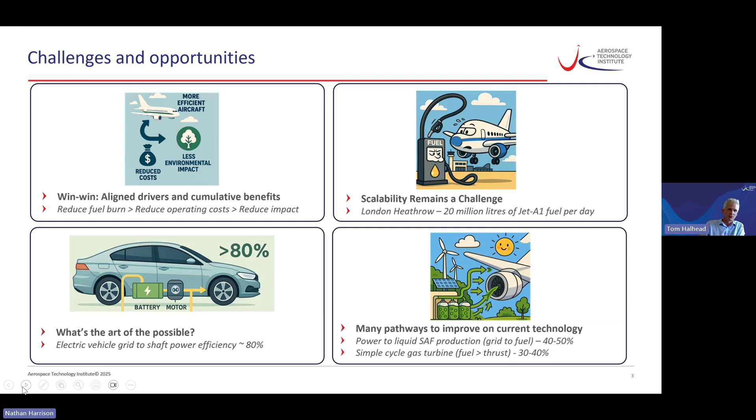So what are we good at, especially in the UK? Engines and wings. Critically, these are the things that make particularly big differences to aircraft efficiency. So the next couple of slides are going to look across a range of timescales. So what are we doing at the moment?

There's obviously a lot of focus on future technology and more disruptive architectures, but there's an awful lot of technology that's been fed into the fleet to deliver incremental improvements. So on the engine side, we're seeing ongoing performance enhancement. What's driving that? Advances in materials, advances in techniques to increase efficiency, keep the engines on wing longer, support performance retention through things like enhanced compressor washing.

So there's an awful lot of technology going into these areas that perhaps doesn't get the press it deserves at times. But also we're starting to see all of the manufacturers demonstrate compatibility with the fuels of the future, notably SAF.

And many of the technologies that we'll talk to in a second on the next generation have applicability to current fleet as well. So the developments that we're funding on future engines are also finding their way to improve the performance of current fleet.

But that'll only get us so far. And for the next generation of aircraft, critically the next gen single aisle, which we're expecting to launch in the mid-2030s, we're looking at fundamentally different engine architecture from the majority of direct drive engines that are out in the market today. At the moment, that could take one of two forms, really.

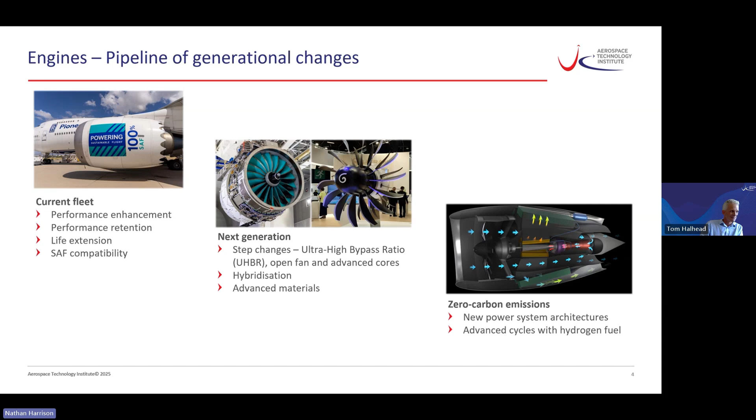Click on, Nathan. Thanks. And so in parallel, what else can we do on the aircraft? Well, our three major themes on the aircraft, if you like, are the airframes, the structures, propulsion, and systems. So on current fleet,

what we're looking at there is there are drag reduction opportunities, but critically there are midlife upgrades, notably the provision of interiors. And what we're seeing is a lot of the materials technology that has been developed for airframe structural use, particularly composites, being applied to interiors, which make up a significant proportion of the aircraft weight. Those get refreshed every 5 to 10 years. So over the lifetime of an airframe, you can achieve significant mass reduction.

That's just one example. We also see cabin systems being reconfigured to reflect more communication demand, for example. And again, those things can be adapted to give efficiency gain. And similarly, we also look to the future in terms of this next gen single aisle aircraft and beyond.

So in the short term, we're looking at increasing composites use, some quite disruptive wing technology, so that's higher aspect ratio wings, and the technologies that will allow those to be operated at conventional airports, things like folding wingtips, and critically more sustainable aircraft operations too. So minimizing fuel burn on ground, in the air through advanced operation, and flight path optimization. That comes with a lot of software technology, and we're looking outside the sector for assistance in doing that.

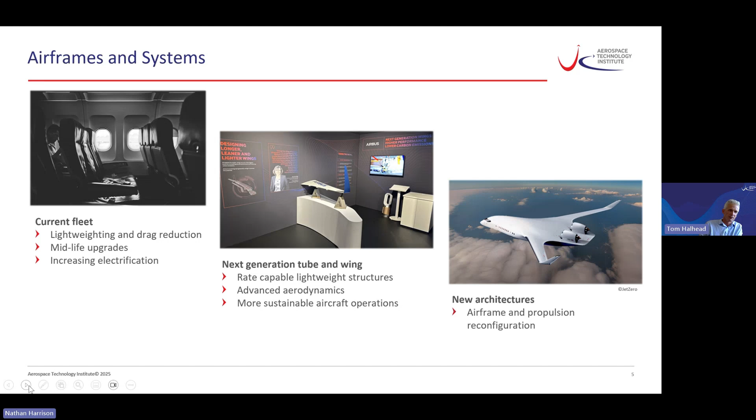And then finally, we've got the more radical aircraft architectures coming through, notably the likes of JetZero's blended wing body concept, and over time that's being touted to deliver up to 50% efficiency improvements as the ultimate aim. So I'll wrap up there, but hopefully that's an overview of some of the things that we're looking at in terms of the airframes, propulsion, and systems aspects of the technology portfolio, all of which are delivering near-term and long-term technology or efficiency benefit. I'll hand over to Alex now, who will talk through some of the advanced manufacturing elements that enable those.

Thank you very much, Tom. So I'm going to talk you through gearing up the supply chain through advanced manufacturing. My name's Alex Hickson. I'm head of technology for structures, manufacturing and materials. So what is the UK good at? The UK is world leader in design, development, manufacturing and test capabilities across aerostructures, propulsion and systems. That offers huge opportunities for the UK.

It also holds the enviable position of having design authority on wing, gas turbines and landing gear, with test facilities to validate these new designs and technologies. The combination of this with the ATI's portfolio of differentiating technology developments in materials and manufacturing that are embedded in the UK primes, supply chain, academia and research technology organisations enables the translation of innovation into lighter weight, more efficient, cost competitive products and services that will be made and supplied in the UK.

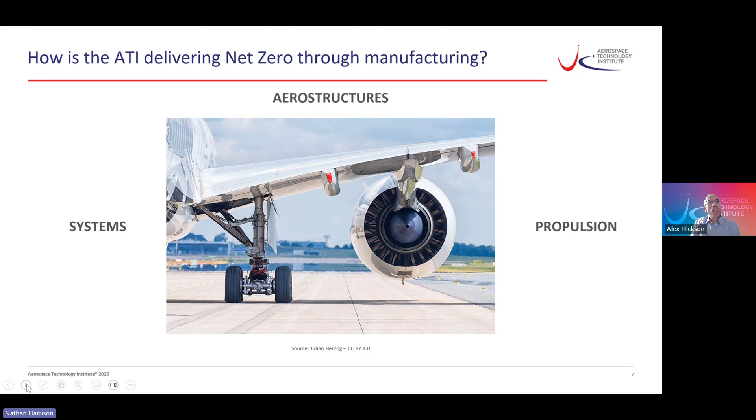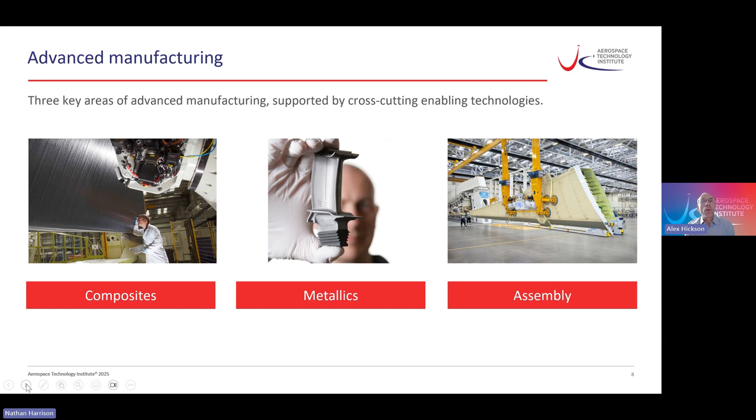So looking to how those investments are spread across the sector. So we have advanced technologies that broadly sit into three categories. There are others, but this is where the bulk of the spending goes, which is looking at composite technologies, metallics technologies and assembly. To bring some of these opportunities to life, where ATI investments will unlock and also help focus some areas of the ATI portfolio. We've looked at these in specific detail of what we're investing in and where the gaps are and things need to address. We move to the next slide.

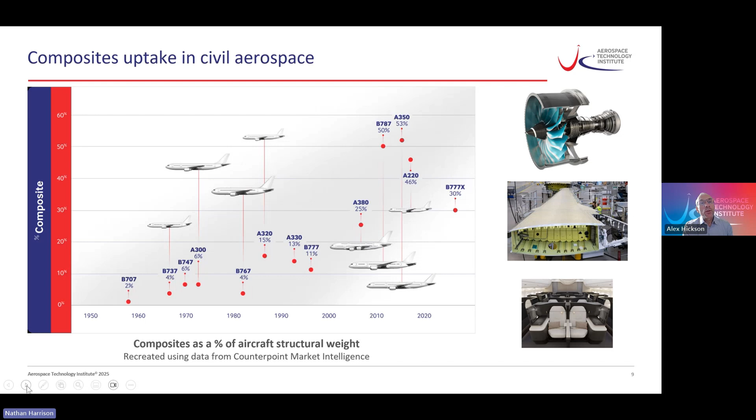Composite technologies enable weight reduction, not just through lower density, higher specific strength or stiffness materials over metallic materials, but also through more integrated structures, reducing parts count and fasteners. In turn, they can also provide benefits in aerodynamic performance, reduce assembly time, and open opportunities in more radical engineering and assembly concepts for further aircraft performance benefits. Composite materials and their advanced manufacturing technologies are critical for the next generation of ultra-efficient and zero-carbon aircraft.

The advanced manufacturing technologies are required across the structures and propulsion systems for converting these new material formats and formulations into aircraft products with minimal energy and material waste, into near net or net shape products, right first time and at a competitive price. That's key to the UK delivering on the benefits of these technologies

whilst also delivering at higher rates. Aircraft today can be built at the order of 60 aircraft a month, but aircraft manufacturers are looking to go upwards of this to 75 to even 100 aircraft per month, which means a complete transition in the technologies we manufacture aircraft with today.

There's a whole range of ways that this will be delivered across the sector. The key is that the technologies have to be looked at across from the OEMs through the supply chain, through the tiers, use of SMEs, material manufacturers, but also tech providers who are providing the tools, equipment, and integration of these technologies.

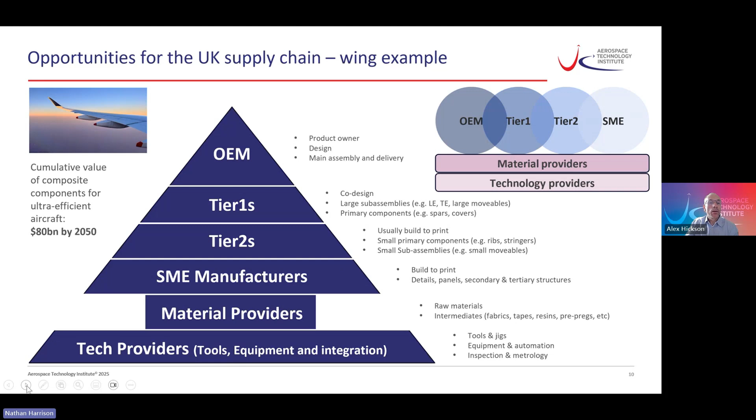We move to the next slide. There's an opportunity to deliver greater benefits on aircraft and economic impact for the UK through targeting innovation across the value chain. We often focus on the technologies for manufacturing the product.

As you can see here from the picture, the UK can enable aircraft and equipment manufacturers to achieve greater performance in service and in current and future factories, to enable a supply chain that delivers world-class performance, making high-rate products right first time with digital passports and the lowest carbon footprint.

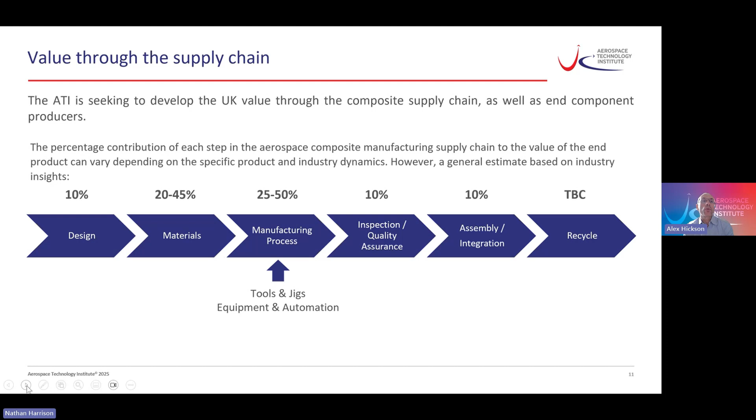So looking at capturing opportunities through having design capabilities here, the materials manufacturing capability here, making the products, inspecting them and assembling them into the final deliverable product, but also looking at the recycling end of life. That's across the materials. The moment, unlocking that is about joining up the sectors and not just thinking in isolation about the aerospace sector.

We move to the next slide. Some in-depth work has been done around composites in aerospace, looking at a market spotlight where we assess the portfolio, where the gaps and opportunities are, and how we can bring the capabilities that are required for these next generation aircraft into the UK, with a capable supply chain able to win this future work.

For more details, please go online, take a look and look at how you can engage to see how we can generate the roadmaps and strategy, and then through our programme fund the delivery of these technologies for the UK to be in the best position to deliver the net zero aircraft of the future.

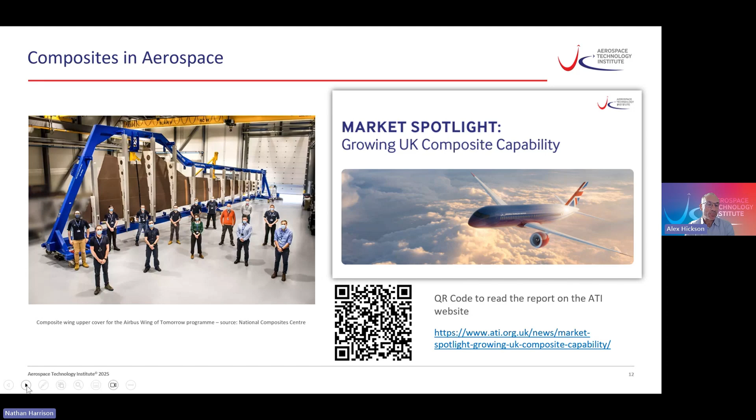Today I'm going to talk to you about some of the work that we're doing in the zero carbon space. There are lots of options that you can use to fly an aircraft with zero carbon, but we're going to focus on two areas in particular today where the ATI has active research programs. Those are hydrogen and batteries. So firstly, I'd like to talk about hydrogen.

We see this as a really promising zero carbon energy source. What we mean by zero carbon is zero carbon coming out of the tailpipe of the aircraft. The ATI led a project called FlyZero that researched all the different zero carbon options and concluded that hydrogen was the most promising, scalable zero carbon option. What we mean by scalable is the ability to scale up to large and long distance aircraft.

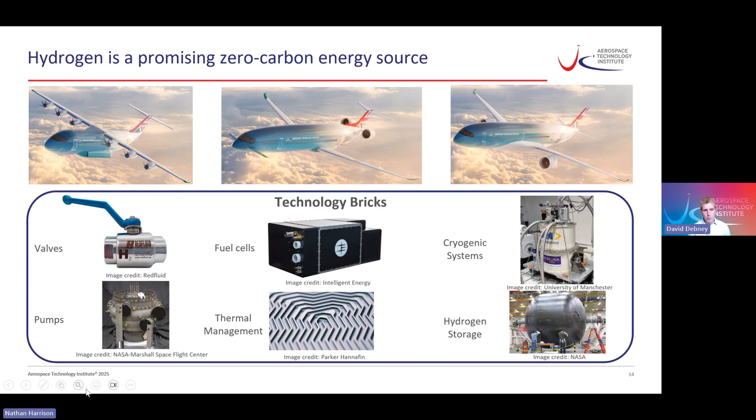Moving on to the second topic of batteries, Tom touched on elements of this already. One of the biggest challenges with batteries is the amount of energy that you can store in them for a given amount of weight. Generally, we refer to this as specific energy. And at the moment, we're at about 200 watt-hours per kilogram. In the next 20 years or so, we think that we might get up to about 600. So what does that mean we can achieve?

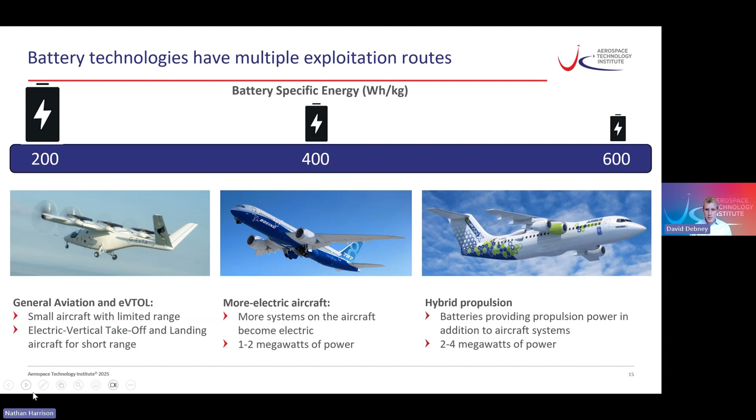This is a really exciting area that has the potential to disrupt some parts of the aerospace industry, and we're really pleased to be working with Vertical. Some of the key areas we've worked with them on are the rotor design, because it's quite unique, and also the battery design themselves. So that's a great segue into the next section of the presentation.

It's my real pleasure to introduce Simon Davies, who I'm now going to be talking with. He is Chief Test Pilot at Vertical Aerospace. He's brought over 3,500 hours of flight experience in more than 85 aircraft types to the forefront of electric aviation. His career began after studying physics and aeronautical engineering at the University of Cambridge before joining the Royal Air Force, where he served 16 years as a fast jet pilot, an instructor and an examiner.

So at Vertical, Simon leads the VX4 flight test program, which is helping to pioneer this new era of clean, quiet air mobility. And he's personally flown the VX4 prototype through its most critical milestones, including the first 3 hovering flights and the recent first flight in airplane mode.

So in May this year, the VX4 became the first ever UK designed, UK built electric aircraft of its kind to operate in open airspace, and the first entirely new class of commercial aircraft to do so from British soil in 40 years. So at the controls of that aircraft was Simon, Chief Test Pilot at Vertical Aerospace, and I'm really delighted to welcome him to our webinar today. So thank you, Simon.